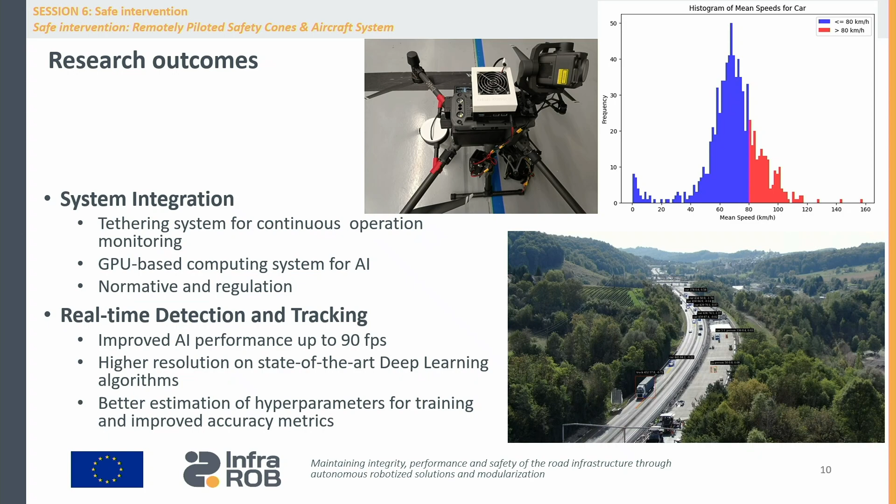This accuracy allows us to calculate safety surrogate measures in real time as well, and these safety surrogate measures are the basis for the safety analysis that then raises alerts to the vehicles, capturing not only the speed of vehicles but other parameters like time to collision and DRAC SSM.

Last but not least, we have developed a system orchestration that enables the collaboration between all these systems together.

This GEOCore software has the capability to communicate with the other partners on the project, and communicate to the roadside unit that other partners use to communicate with the infrastructure, and from the infrastructure to the vehicles that have this capability.

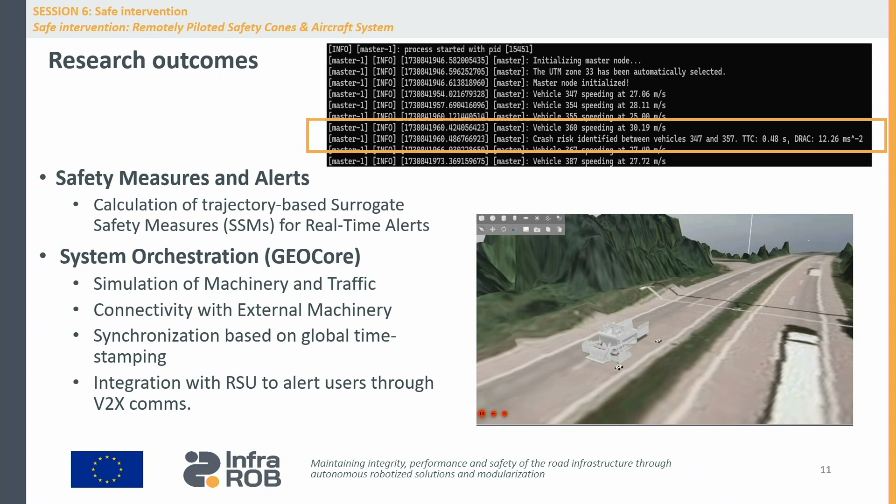So if we look at the main outcomes as a conclusion for this project, we improve safety by reducing workers' exposure to live traffic, with 3 pillars.

These 3 pillars are: the remote pilot aerial system with artificial intelligence capabilities to perform vehicle tracking with high accuracy; the extended autonomy of this remote pilot system with tethering solutions to have several hours of operation; and our custom-developed software to orchestrate all these elements.

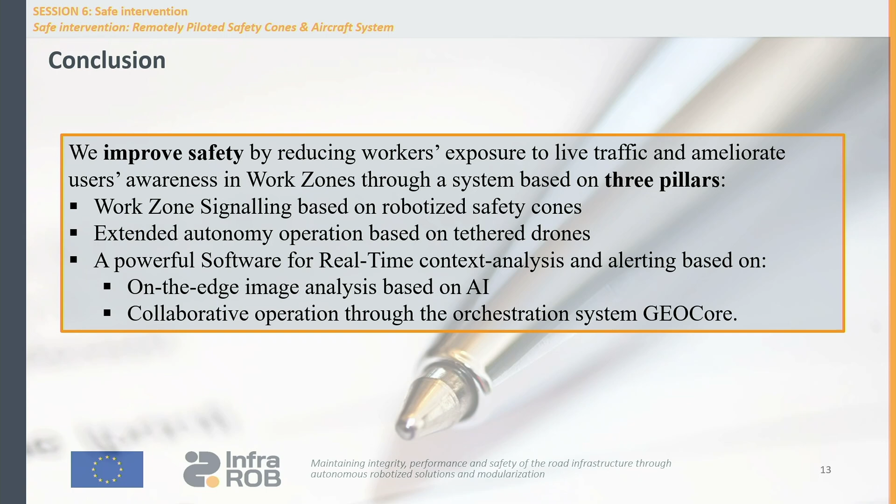Finally, the future trends for this software and remote pilot systems. First is to improve the TRL of the system to go to market, or at least to have a more robust solution. Second, the application to other mobility services like smart cities.

And finally, to deepen the integration of simulation software, to improve the system's capabilities to predict conflicts on the road, and then have a measure to try to avoid these conflicts that would cause, for example, road crashes. So thank you for your attention.

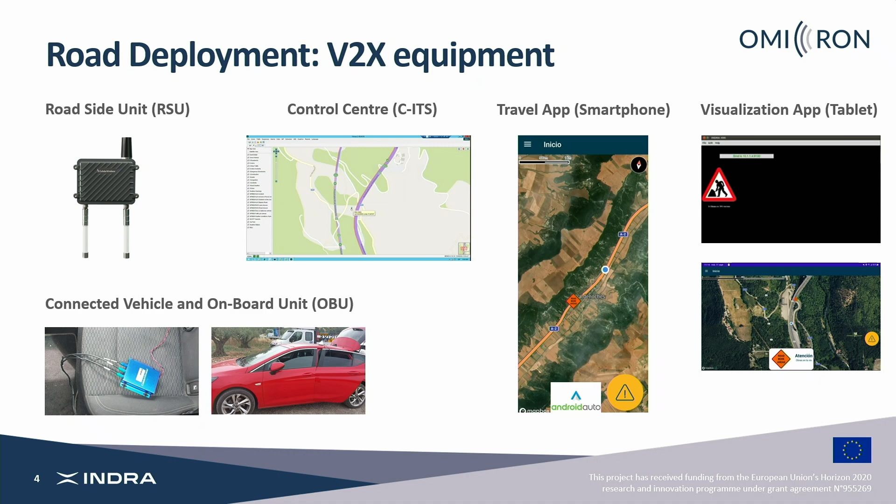The onboard unit is placed in our connected vehicle, and then our human-machine interface, our visualization, can be on a smartphone, through a visualization app in a tablet, etc. In the future, this would be in the typical screen that we have in the vehicles.

So, in the context of the OMICRON project, we performed 2 different tests. The first one was on the A2 highway in Guadalajara, together with our colleagues from Acciona Concesiones. We installed one RSU there, and also we brought one connected vehicle.

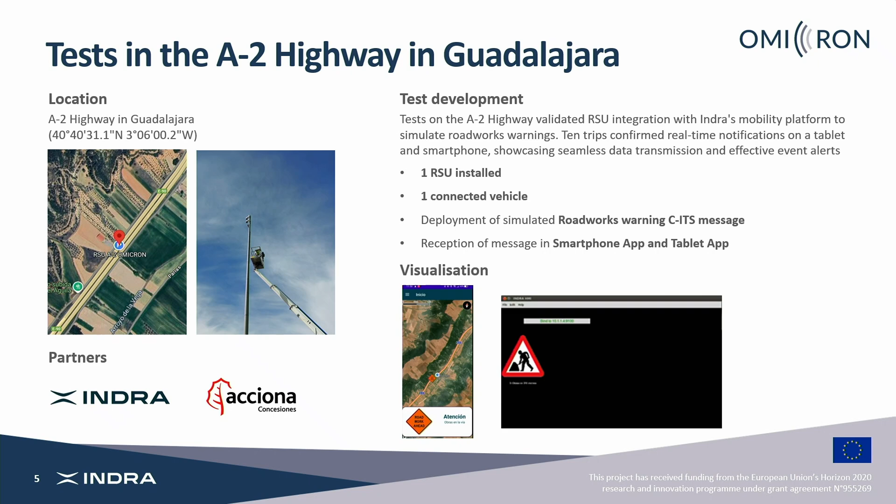We obtained information from the Acciona maintenance service. They provided us the typical roadworks that they had on the road, and with this information we could create a roadworks warning that we sent to the vehicle.

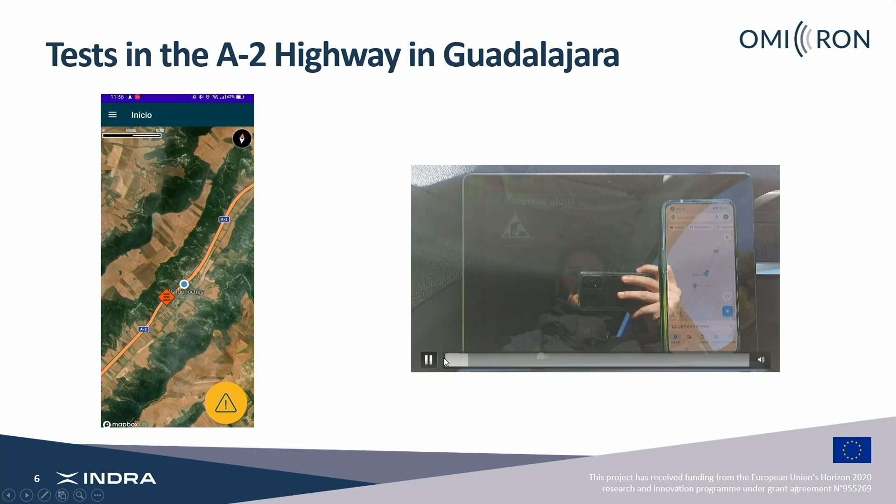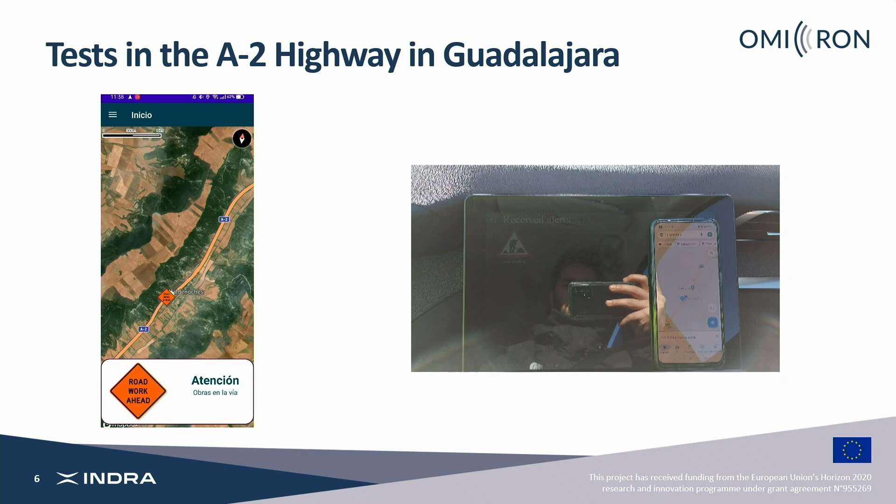There are 2 videos. In this one, we can see how we receive the information in our tablet, and in the other one, we receive the information as we enter the range of the RSU. We receive this notification in our smartphone, and as soon as we cross the RSU, the incident message disappears.

Regarding the second test, the final test performed in Florence, together with Autostrade per l'Italia, we deployed another RSU. We also brought one connected vehicle, and in this case we created a roadworks warning and visualized this information in 2 environments, in a smartphone and also in a tablet.

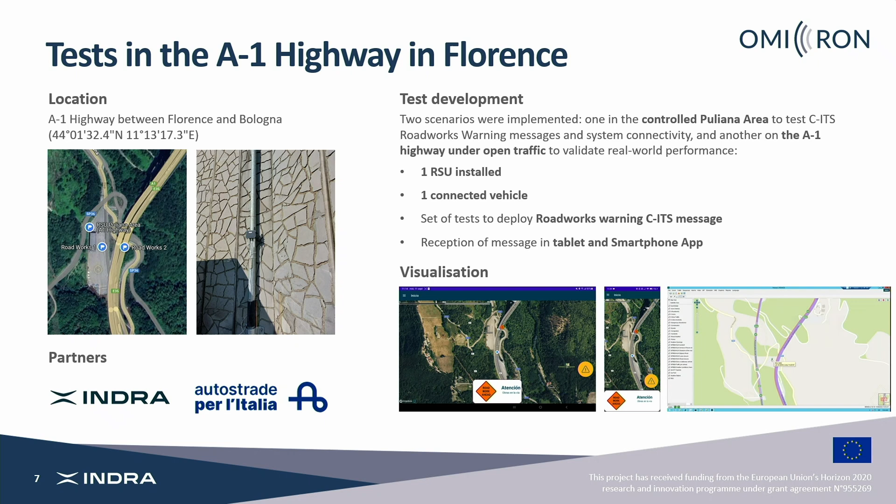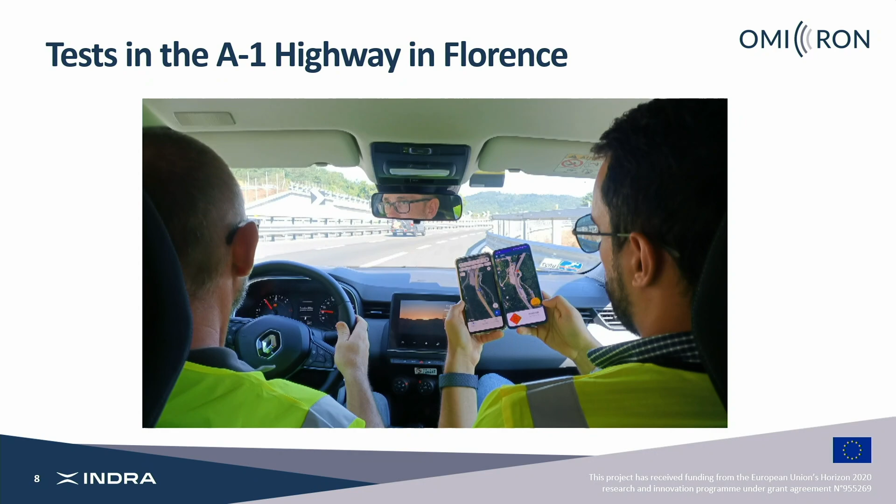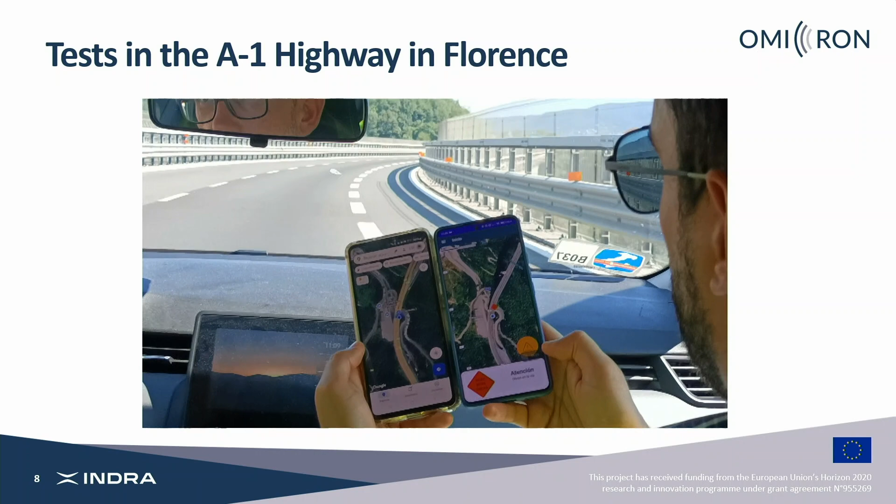So this is another video. As soon as we reach the range of the RSU, we receive the notification in our mobile phone, and as soon as we cross the incident, which in this case was a simulated incident, the message disappears.

So, as final results and conclusions, we could say that we enhance our detection distance. In the section where we place these RSUs, we can increase the reception of this real-time information by 2 minutes.

Also, we reduce this traffic disturbance, so the vehicles can maneuver, change the lane, reduce their speed, or modify their routes.

After receiving this information, we also expanded the sources of real-time information, despite the typical ones we have all in our smartphones, or the typical public authorities information. We can provide this from the operators of the road.

So we can say that this V2X enhances safety during the maintenance by providing real-time updates, enabling seamless communication among stakeholders, and offering also a scalable solution based on connected vehicles adoption. So this is it from my side. Thank you very much.

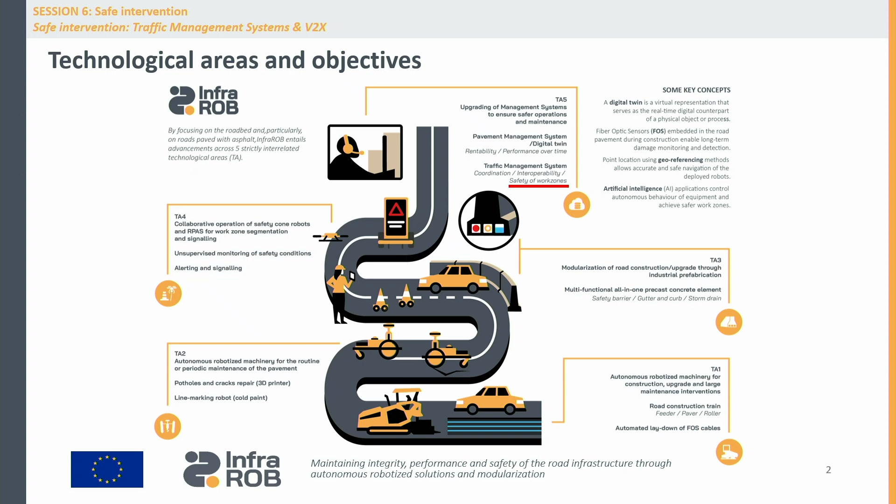So in order to get a hold of this safety in the work zone, there are some things that should be done first, and that is that we have to figure out how to communicate between the workers, between the vehicles passing the work zone, and also vehicles within the work zone. So they have to develop the methodology to incorporate robots in this environment. We assume that there is some communication already there without the robots, and then we are going to put the robots into it and see what's going on with regard to that.

For that purpose, we need, of course, as you already heard, to track maintenance robots and machines, but we don't really know what's going to happen with robots because robots are not being used today. So for this purpose, we need to simulate a bit. And if you don't know what's going to happen, you have to simulate and try to figure out whether there is some difference between simulations of what we already know.

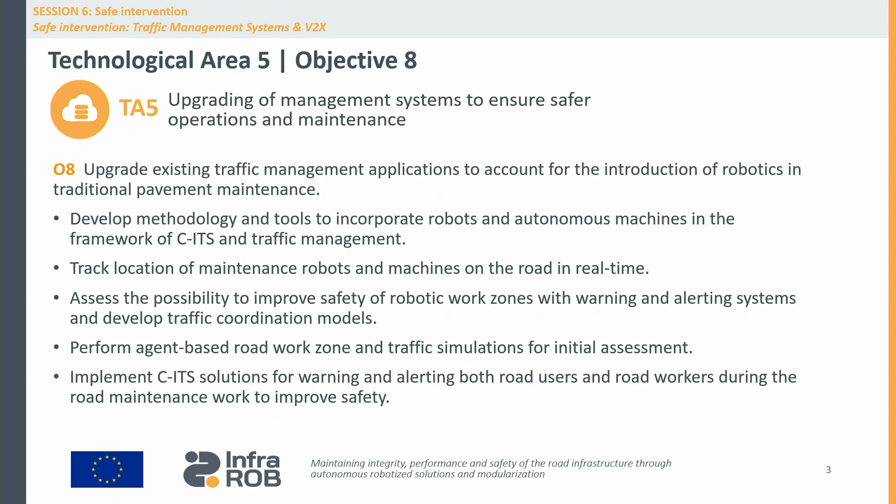This is actually the maintenance actions without robots, and the one that we don't know is the maintenance action with robots. This is actually one of the things that we did with the agent-based simulation of the work zone, in order to figure out what is the difference between these two.

So this is here a big picture. You don't need to read what is here. There are two things, however, that are quite significant here. One is that this communication pattern here is actually telling you how the different actors are communicating with each other. You're going to hear that from Leonard in much more detail.

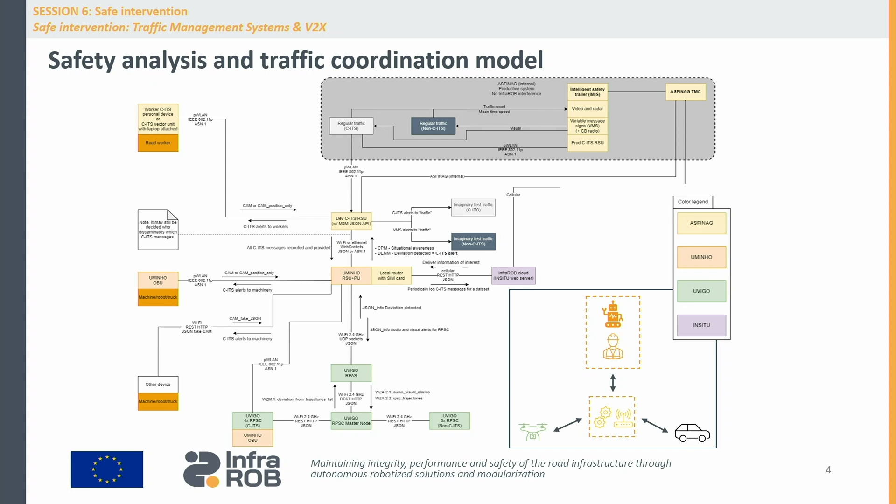On the right-hand side, back down, you have seen that there is the drone that you already heard about. There are onboard units, there are the vehicles, and they communicate with each other. One thing I would like to emphasize here is that the upper part in the gray area is actually plugged into the existing ITS system of ASFINAG, which is kind of a nice feature as well.

So, what is happening on the ground? You know, if everybody would behave nicely, we wouldn't have any kind of communication, but people don't behave nicely, and in some cases bad things happen.

So this is everything nice here, but it's not always like that. In some cases, something like that happens, you know.

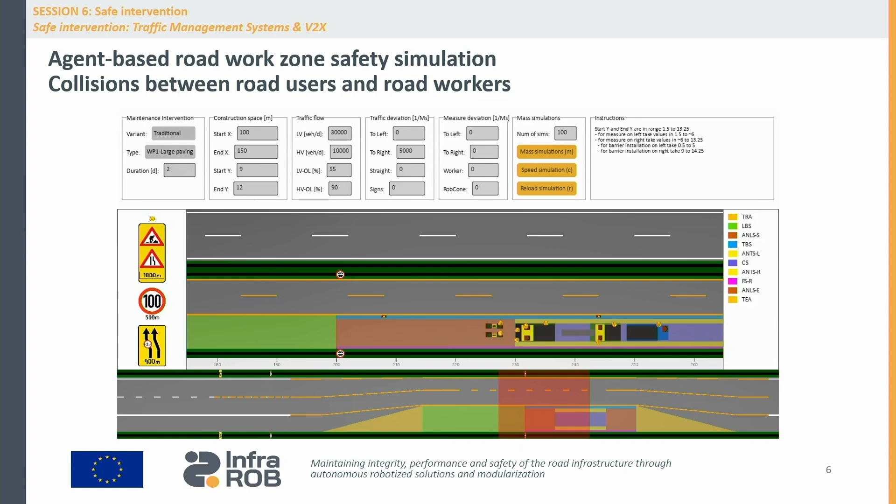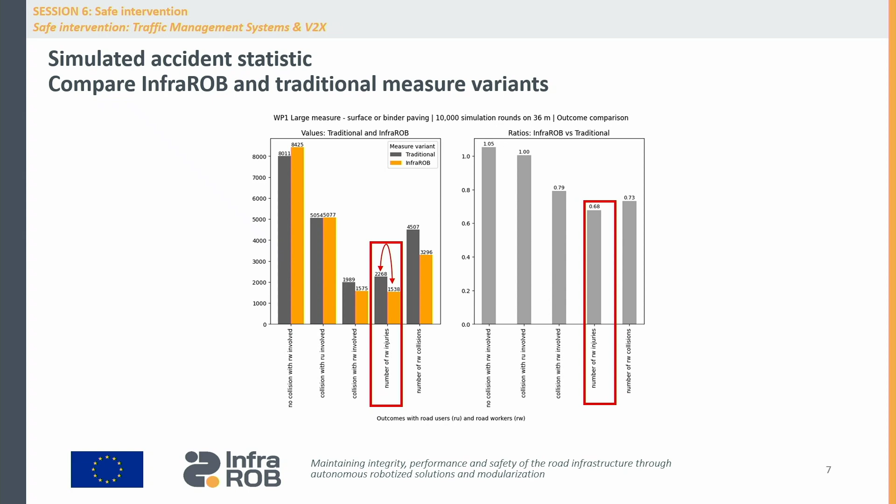And this is the effect that we are expecting if we start really using robots in the future to the same extent. Now, there's also the question of whether this whole communication would function nicely. There are latency issues, issues of the moving traffic and so on. So there was also a second simulation, taken care of by Minho, in which we did multiple simulations in order to figure out whether the time to inform

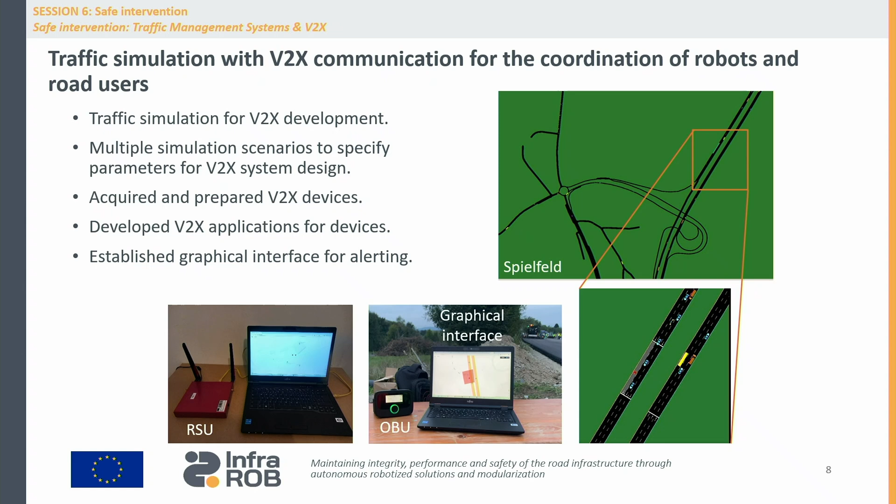workers and also the vehicles is sufficient enough to prevent bad things happening. This is something that has been done with the simulation presented in this diagram here. So the overview of the simulation is presented in this slide.

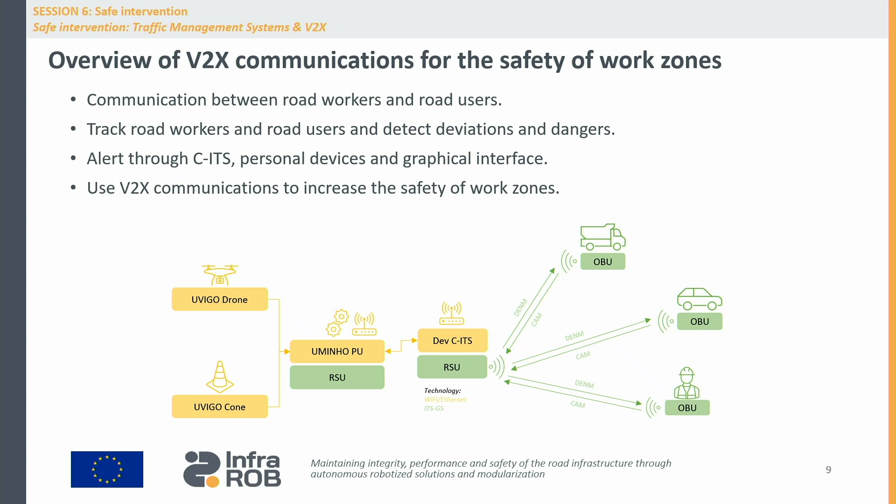You see here there is a cone that was already presented before. There is a drone which is also giving information there. There is a roadside unit, and there are also onboard units, and we also assume that the workers would have onboard units which are going to tell them if something bad could happen to them. So with that overview, I give to Leonard.

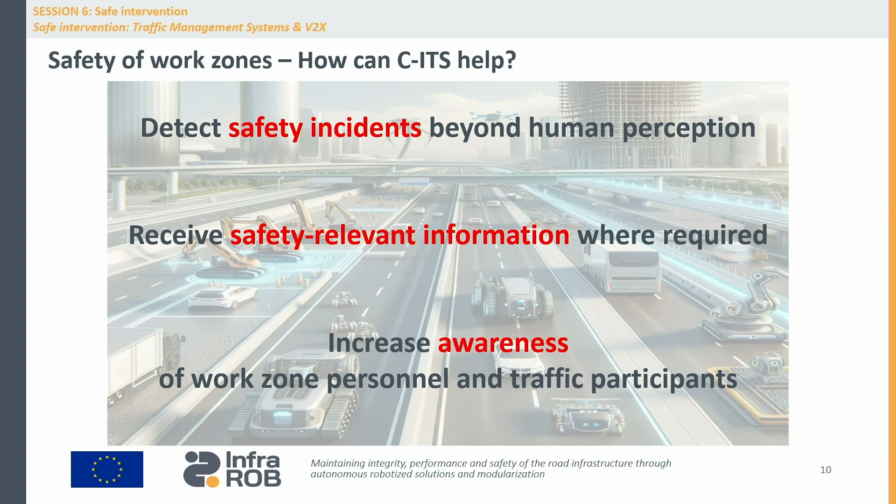I'm happy about the nice introduction to V2X from Martin. If we have a cooperative ecosystem, we know more about safety incidents, we get them faster, we get safety relevant information where required, because the instances are connected, so we're talking about connectivity here, and also we have the chance to increase awareness of the work personnel as well as the traffic participants. So this is something we looked at very deeply in InfraROB, and did some demonstrations there, and I will present the results to you.

So the C-ITS-based use cases, all of these things which are connected, you've heard before. There are 4 major use cases. One is the roadworks warning, I'll come to all those later in detail. One is the roadworks warning, which is in fact productive at ASFINAG.

One is a speeding vehicle, you've heard about this before as well, when the vehicle has dangerous movement, too fast, and it moves into the work zone - there C-ITS can help. We have a person on the road, which means that a worker does not pay enough attention and gets too close to live traffic. And we're talking about the deviating machine in the next slides.

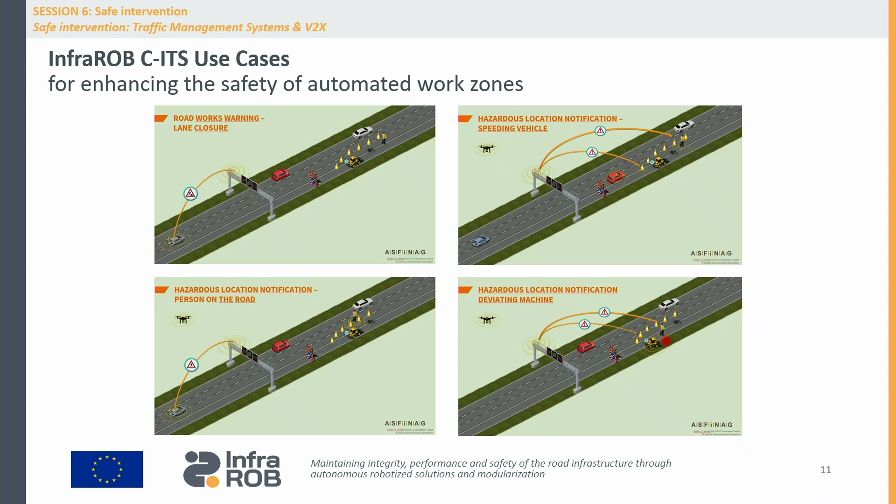So that means that if you have more and more automation on a construction site, then it could happen that a machine has wrong behavior, and of course everyone should be involved to see and be aware that something is not okay. So we did this all in Spielfeld, Austria, in the south of Austria.

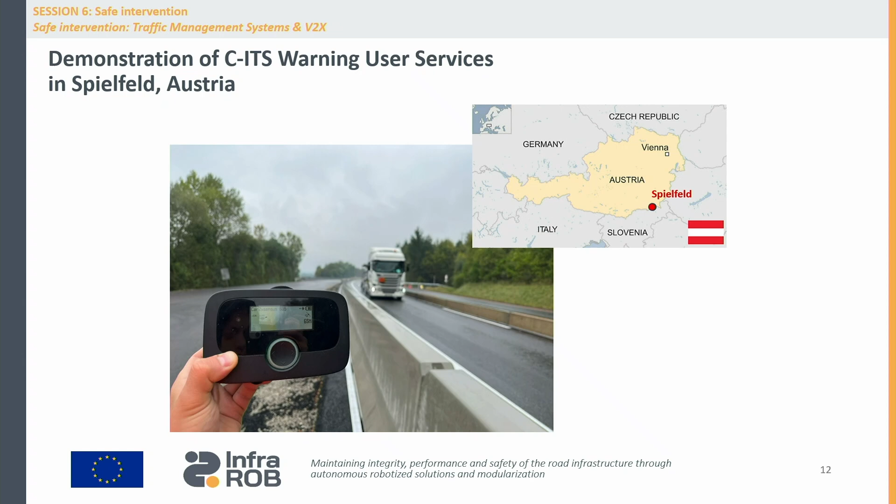We used those portable devices there, as you see in the image. They're also outside, we have a demonstration, so for those of you who would still like to have a look at those devices and see some demo, just stop by. And what we also had on site, Rada was also talking about all these items there: the drone, the cone, the processing unit, and so on.

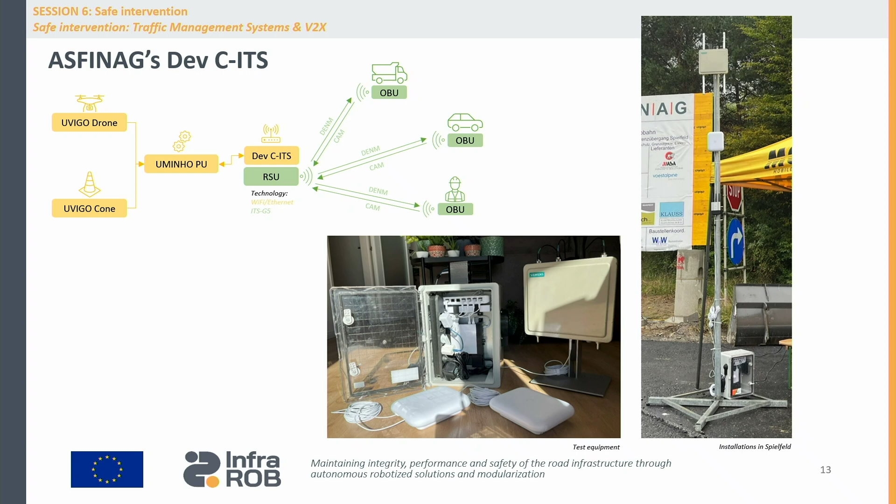So we had it all in a quite rugged box, with some industrial PC and then the roadside unit and access points, and we installed that in Spielfeld. And then we had the chance to do some tests there, some demonstrations.

So the first one, as I said, the car approaching, it's nothing special. It just needs to know there's a roadworks warning ahead, which means I have to reduce my speed, I have to pay more attention, maybe change the lane. This is something which is productive.

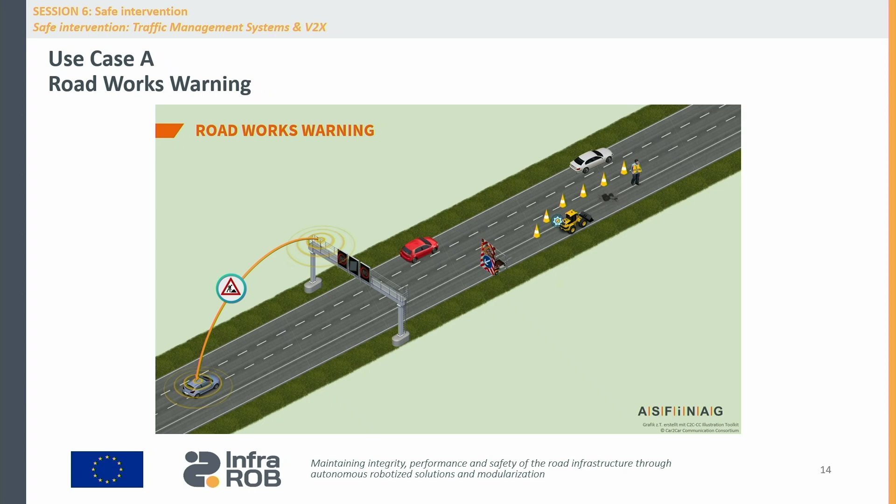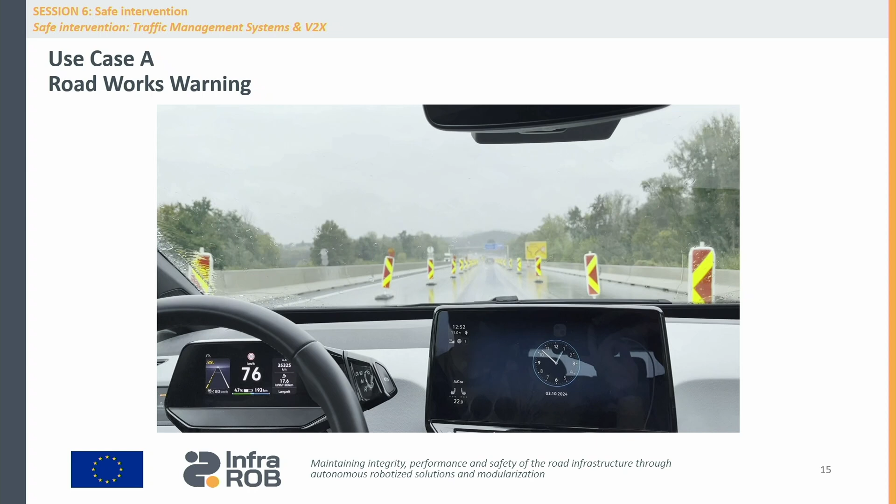And as it is productive, we are sitting in a Volkswagen, a Golf 8, and we're just approaching the roadworks. So the video starts, and what is important here is in the cockpit you'll see some message. In this case it's in German. It says construction site ahead.

So there was in the cockpit a message saying construction site ahead in German, and you get the information as early as required, and then you can increase safety. So this is something we did in InfraROB as well, although it is a live service in Austria. The next thing is a speeding vehicle.

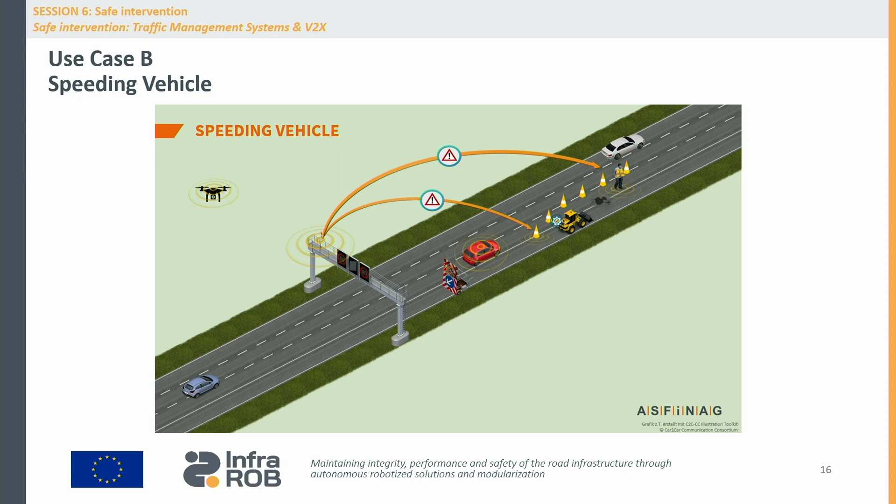This was developed within the project. So what does it mean? It means we have a drone. It means we have information that a vehicle is on a wrong track. And what we do then is we can give these portable CITS devices to the workers.

Maybe you know one of these workers, he sits in the audience. And when then a car is approaching, of course, we set the threshold rather low. I mean, we didn't go too fast on the highway. But there you see the...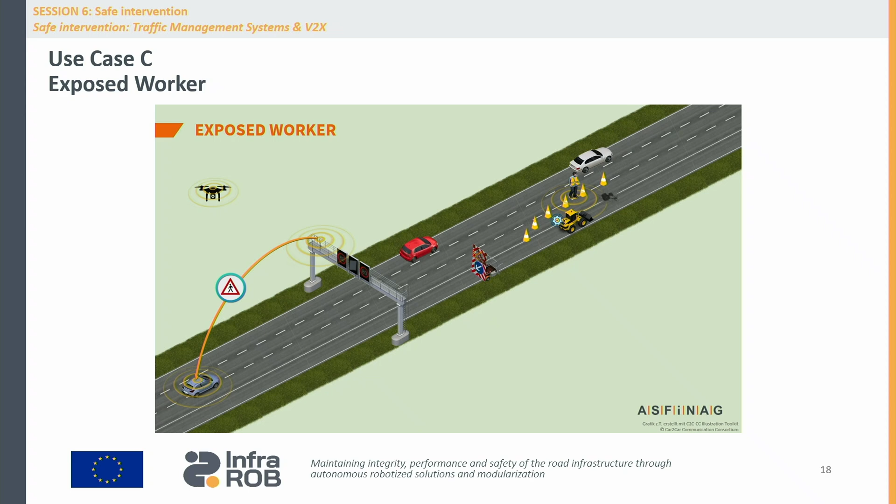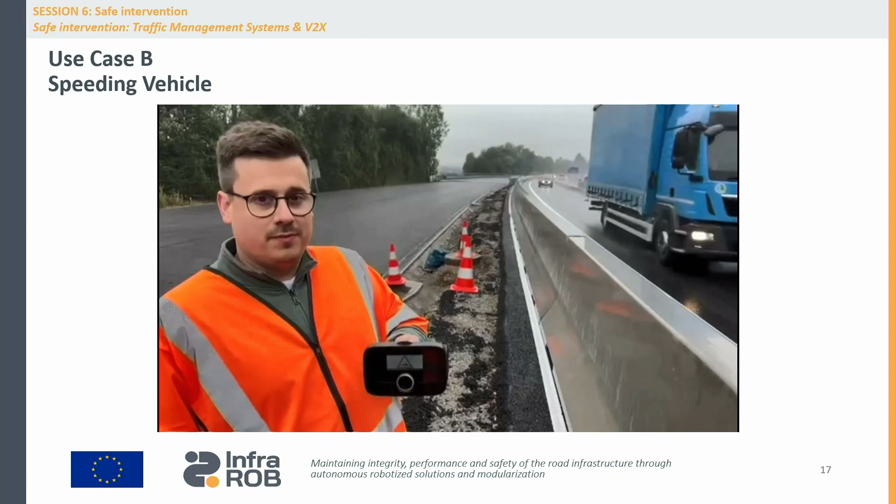So you see the Volkswagen approaching, and the Volkswagen also sends out CITS messages, so we know where it is. And if it gets too fast, we get this special message saying speeding vehicle, and everyone is warned. This is the corresponding icon.

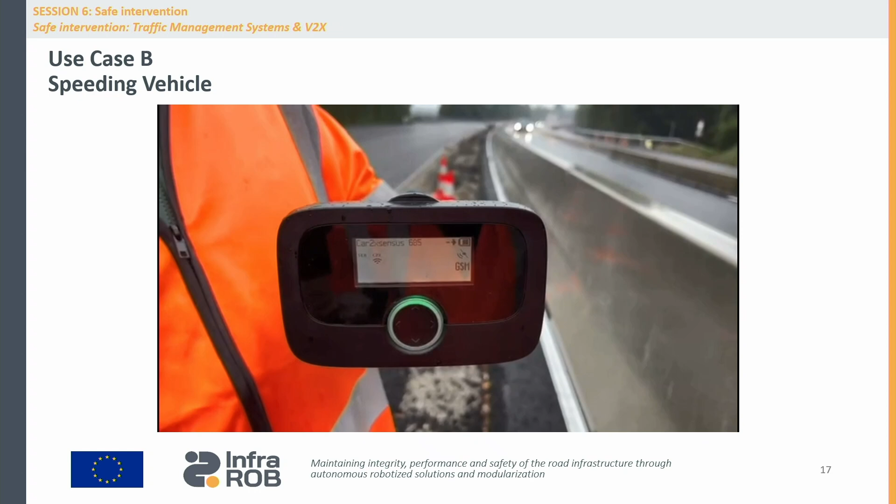And the third use case is the exposed worker. So if a worker gets too close to the live traffic, everyone should be aware. And this is not productive, so we again sit in the same car, but we have the portable devices now shown additionally. And on the top right-hand side, you see the other perspective.

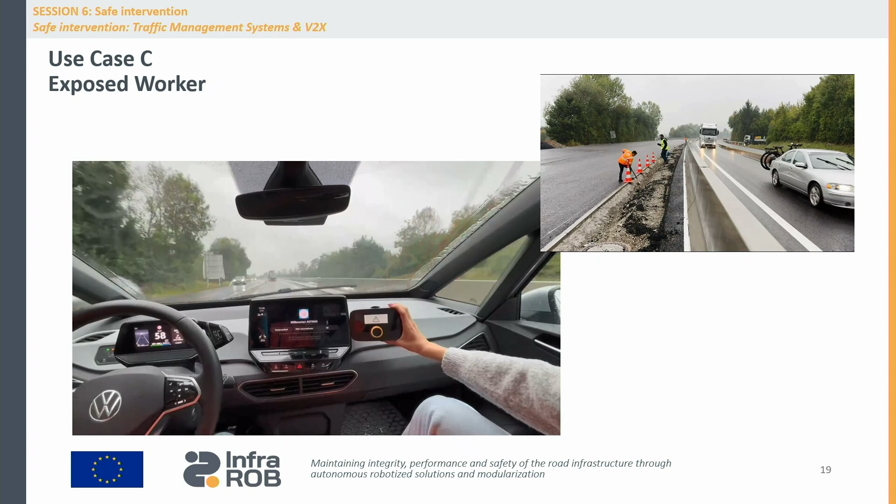So those videos are synchronized, and you see that the worker wearing such a portable device now gets very close to live traffic, and a message appears. So there he comes, and we detect his position because he wears that device, and we see person on the road, and the driver gets warned. And last but not least, it's the deviating machine I was talking about.

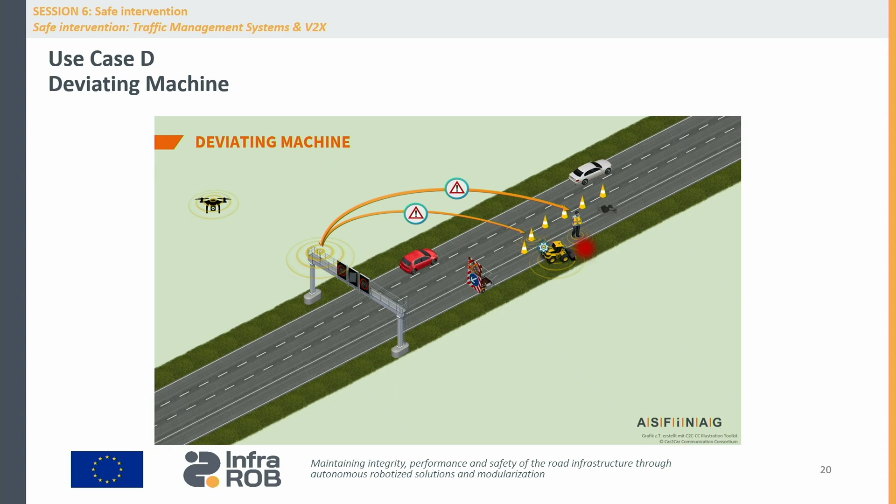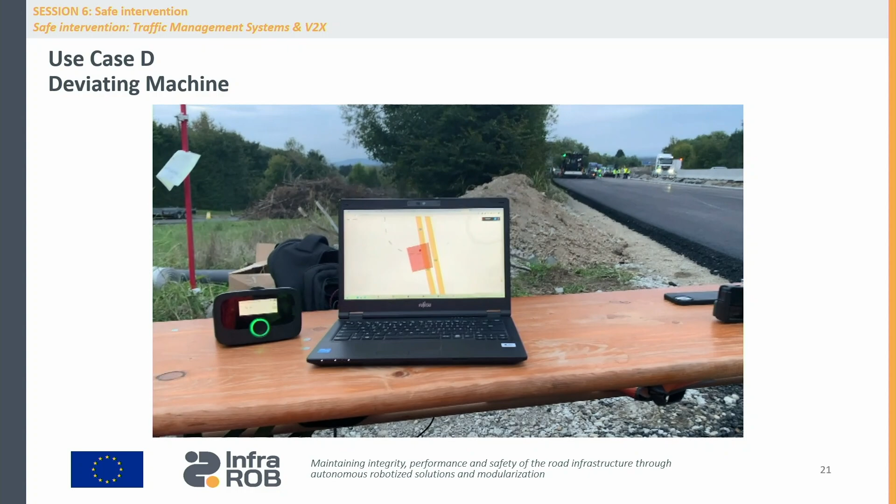So this connects to the automated paver, which was developed in the InfraROB project. And what we did there, again, we have this portable device, and we put another portable device to a roller, and we defined a rectangle, which is an area allowed for the roller. And as soon as the roller leaves that area, we get a deviating machine message.

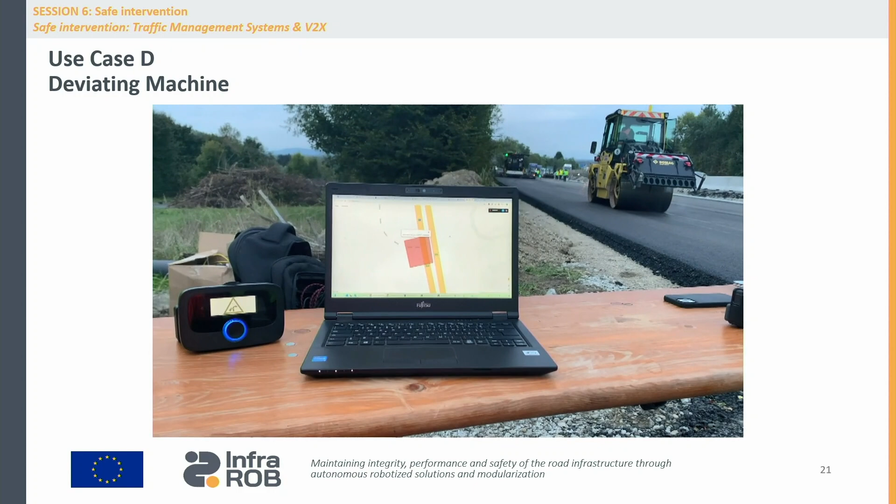There you see it, it's all dedicated short range, it's all within the CITS ecosystem. So these devices can help us to increase safety, to make everyone aware if things go wrong, track positions of machinery, and so on.

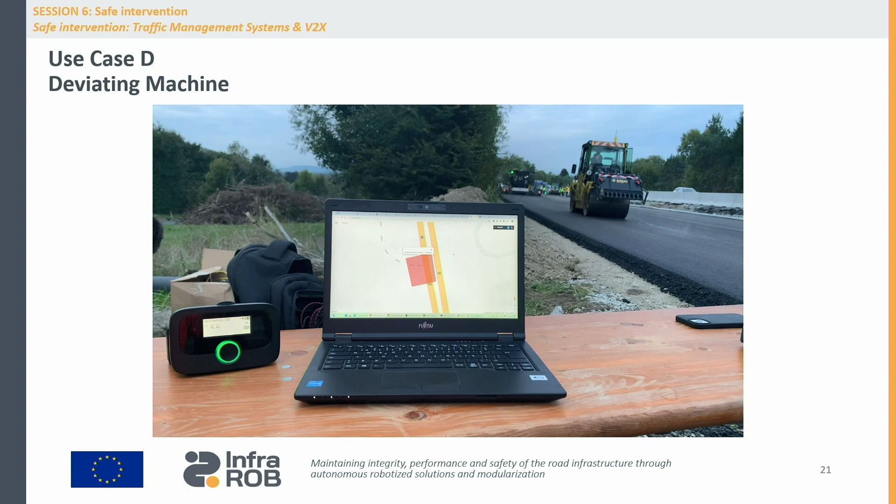So that's it for the demonstrations we had in Spielfeld. What's next? One thing is for more enhancements in that field, we should have better and more accurate and more structured accident data, as basis for calibrations, for simulations, so that we can proceed there, what Rade said. Then we need further testing in various environments. I mean, this was a proof of concept, but of course there are different weather conditions and different types of roadworks.

Then standardization is a topic. We've heard about it before. Some things are standardized, but those new messages, like the deviating machine and the speeding vehicle, have not been standardized yet. So this is the path to follow.

And last but not least, these products, you've seen them, they're meant to be in a bus, in public transportation, so that you get green light. So we just took them and used them completely different, had big battery packs with them, and of course we need some product enhancements so that workers are really helped there.